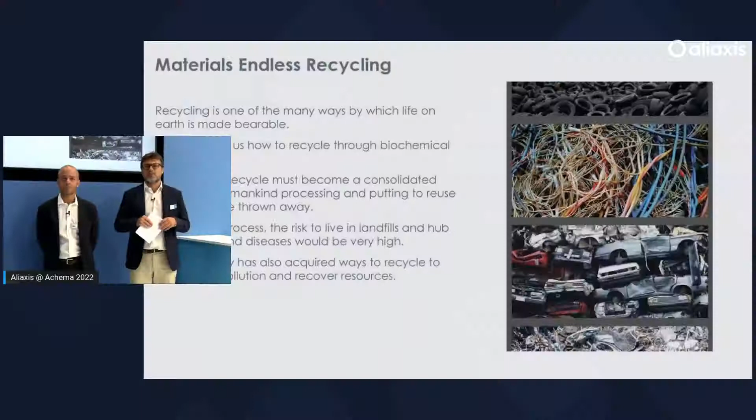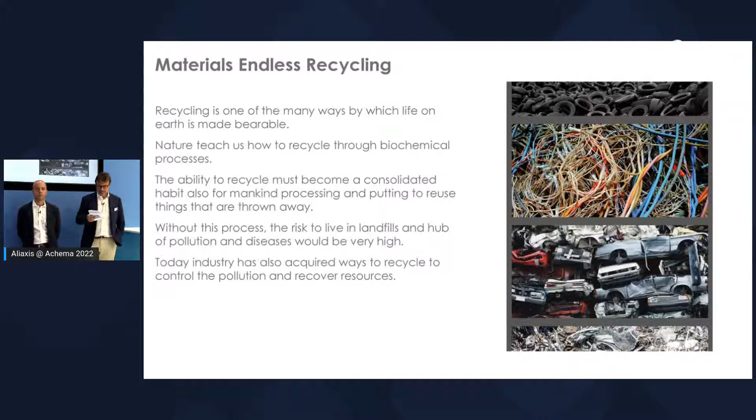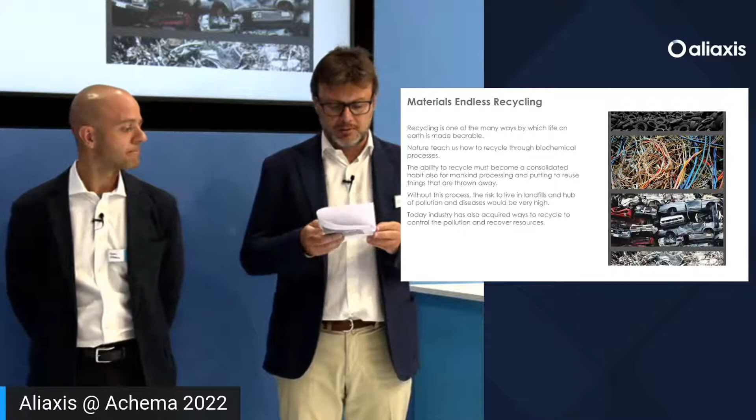Today we are going to present new case studies, starting with one referred to the Belgian market. In this case, we are not referring to a specific project, but more to a market segment where we are really active and successful on the Belgian market, which is the materials recycling process. Material shortage and pollution are critical problems for the environment and mankind. We have to find new ways of recycling and reusing materials, since without this, life on Earth is not bearable. Nature teaches us how to do it with biochemical processes, but mankind has to find ways to recycle materials in order to reuse them and reduce consumption, since we are upgrading our lives year on year and facing increasing difficulties of disposal and material shortage.

Thanks to recycling technologies, we can reuse in safe and eco-effective cycles the materials that have been disposed of, protecting human health and the environment. Almost all waste can be treated and recycled. Just to give a couple of examples: end-of-life tires, exhausted batteries, car wrecks, and shredded residues.

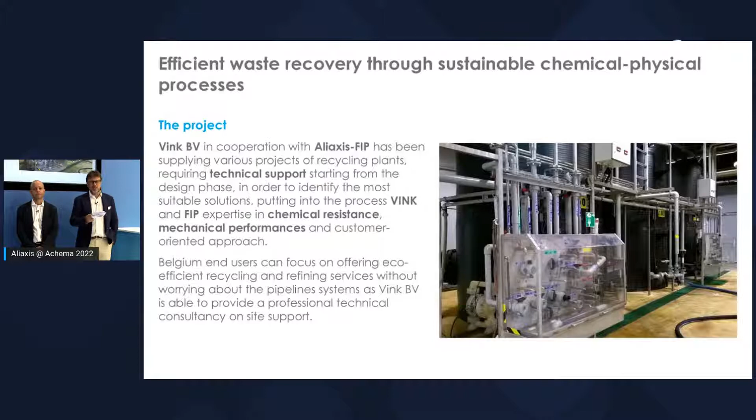We are going to focus today on the partnership between Vink Belgium and Aliaxis, in particular FIP, over the last years in this specific market segment. Vink Belgium, in cooperation with Aliaxis, has been supplying various projects in recycling plants. These projects require a high level of technical support already in the design phase. Aliaxis and Vink are able to suggest and guide customers to the most suitable solution, putting on the table expertise in chemical resistance, mechanical performance, and a customer-oriented approach as usual. The result is that Belgian end users can focus just on offering eco-efficient recycling and refining services without worrying too much about the pipeline system, since Vink and Aliaxis provide professional technical support and consultancy.

Just to give a couple of examples of recycling projects we have approached over the last years, we can mention end-of-life tires. The huge consumption of tires needs a way to collect and recover them in specific plants. The rubbers are shredded through chemical and mechanical processes. The raw materials they are formed of can be reused, like rubber and textile fibers, but also the metal, the steel rod they are made of. Tires are widely used, so the huge consumption can lead to an efficient reuse of raw materials, but also to the generation of power.

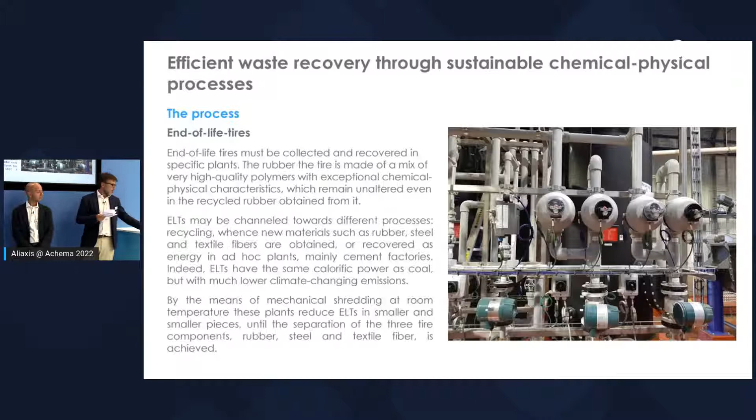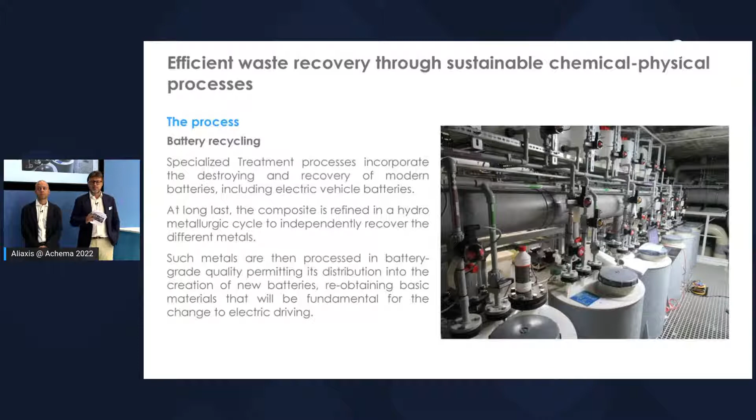If we talk about another recycling process we've approached over the last years, we should mention battery recycling. In specialized treatment processes, these batteries are destroyed and recovered in order to reuse and recover the metals and acids they are formed of. At long last, the composite is refined in a hydrometallurgic cycle to independently recover the different metals. Such metals are then processed into battery-grade quality, permitting their distribution or reuse to form new batteries, in an endless recycling process.

But let's talk a bit more about the partners of this project. The end users are the companies working in this market segment, the recovery and recycling field. The main partner of Aliaxis in this case is Vink Belgium, a 50-year-old company, active since 50 years in the field of plastic piping systems, and from the beginning partnering with FIP, particularly on FIP valves, the Aliaxis brand FIP.

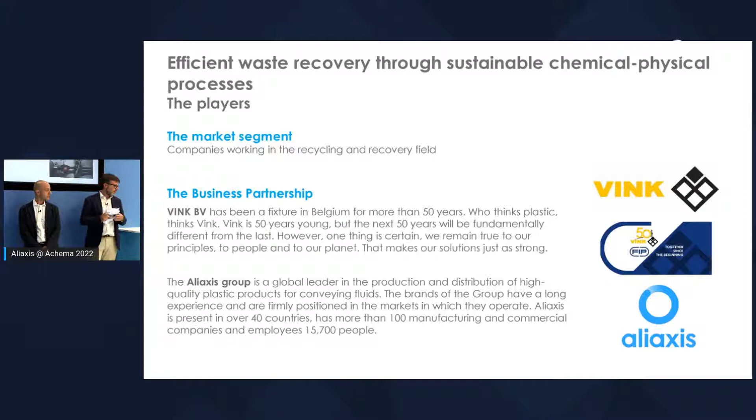What are the needs of this specific market segment? Of course, technical support for the solution selection, in order to identify the best chemically resistant piping and material, taking into consideration abrasion, regulation, and dosing features needed by the application, and lightweight, which is always a benefit of plastic piping systems. This way, Vink and Aliaxis have been able to provide a full offering of piping systems in PVCU, CPVC, PPH, PVDF, but also the full range of butterfly valves and ball valves, VKD and FK series, and the VKR, the regulating ball valve, manually and actuated version.

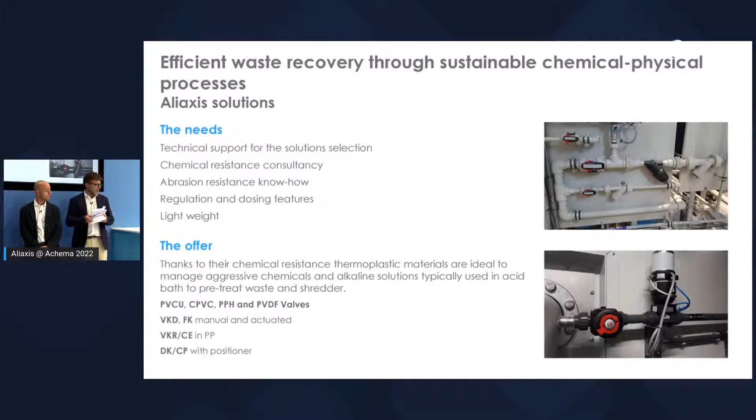This way, let me leave the stage to Dario, who will give you more insight on the key product under the spotlight, the VKR.

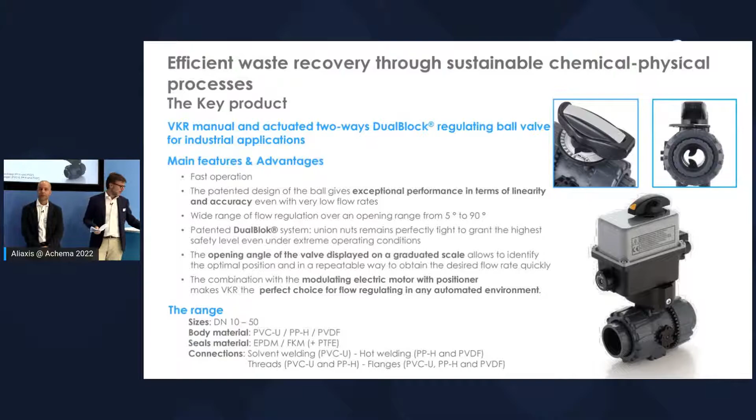Thank you, Gianmarco. Beside me, you can see the VKR valve. The VKR is a manual or actuated two-way regulating ball valve, which is the ideal solution for industrial applications. The main benefits of this valve are, of course, that it's very fast to operate. But the most important thing is that the patented design of the ball permits full linearity between the opening grade of the valve and the flow rate that passes through it. The graduated plate on top of the valve ranges between an opening of 5 to 90 degrees, and it permits gathering the desired flow rate also a second time, when we reopen the system. Of course, the possibility to actuate this valve gives, together with the linearity of the flow, a perfect solution for industrial applications.

The dimensions of this valve range between 10 and 50 millimeters in diameter. It's available in different materials: PVCU, PPH, and PVDF for the body. And of course, the connections are also very different. We have solvent welding, hot welding, threads, and also flanges.